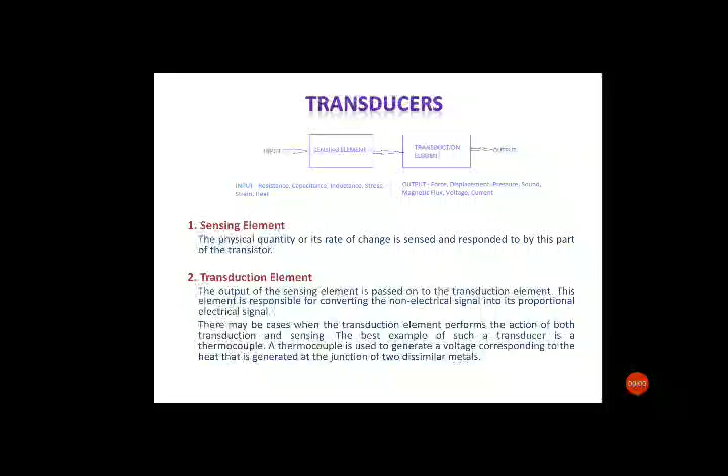Okay, in this session we'll be continuing our discussion on transducers. We know basically a transducer is an element which converts one form of energy into another form, and it consists of two elements. One is a sensing element and the other one is a transduction element.

Sensing element receives the input and the transduction element gives the output, and the input and output will be mostly in different energy form. Input may be something like a variation in resistance, capacitance, inductance, stress or strain, whereas output may be something like a change in force, displacement, pressure, sound or magnetic flux. And we'll see in detail the function of each of these elements.

The sensing element deals with the physical quantity under consideration. It measures the physical quantity or its rate of change, and it will give a proportionate output to the transduction element. The transduction element will convert the output of the sensing element into electrical quantity. So that is the basic function of these two elements.

But in some transducers there won't be separate sensing and transduction elements; rather these will be combined together into a single element which will receive the input and generate electrical output. One example may be a thermocouple. In a thermocouple, based on the temperature changes at the junction, a corresponding electrical signal or EMF will be generated. So that is how generally a transducer works.

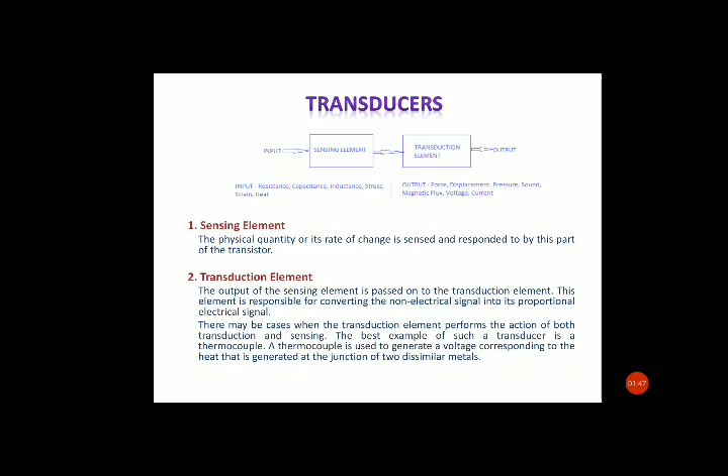We'll see a particular type of transducer which is a strain gauge. Basically it's a resistance based transducer. So in the coming session we'll be seeing in detail about the strain gauge. The strain gauge basically measures strain, or in other words it measures the pressure or weight acting on it.

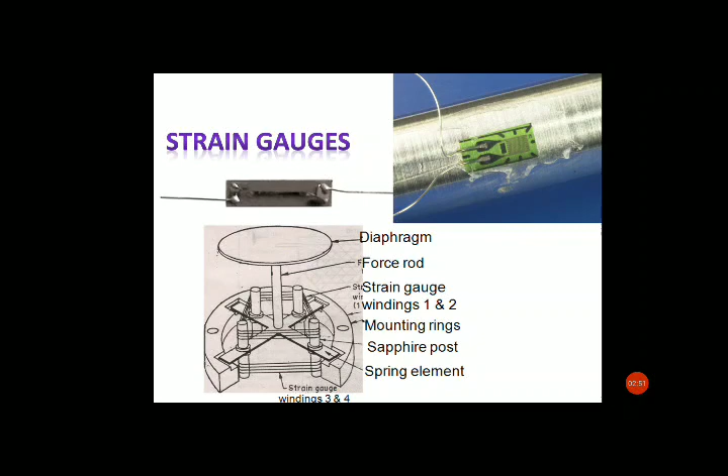So these are the applications of strain gauges, and it looks like a thin wafer like structure as you can see in the image, and it will often be connected to the physical quantity where we need to measure the pressure or force or weight acting on it. In the image you can see the strain gauge is attached to a metallic pipe, where we need to measure the strain acting on the metallic pipe.

And coming on to the working principle of strain gauge. Strain gauge is a passive transducer, means it doesn't require external energy sources, and converts a mechanical displacement into change of resistance. So that is the basic principle of a strain gauge. It converts mechanical quantity into corresponding change in resistance. So a strain gauge is a thin wafer-like device that can be connected to a variety of materials to measure applied strain, as we discussed earlier.

So metallic strain gauges are manufactured from small diameter resistance wire, basically composed of resistance wires that can be stretched upon action of strain. So based on the stretch of this metallic wire, the resistance will change, and according to the change in resistance we will be able to get the quantity in electrical terms.

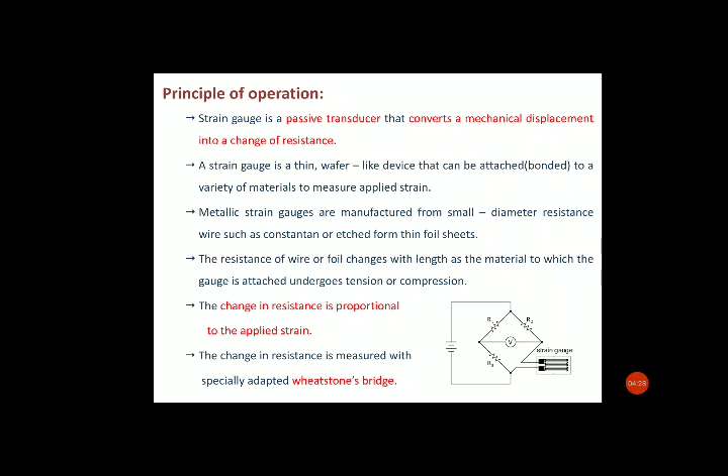The change in resistance will be proportional to the applied strain, and you can see a diagram here which is of a Wheatstone bridge. Wheatstone bridge is used to measure the unknown resistance. So one limb of the bridge is connected to a strain gauge so that we can measure the resistance of that particular strain gauge or the resistance wire. So this is how it works.

And now in this session we will be deriving an expression for gauge factor. Gauge factor is a very important quantity regarding the strain gauge, and it is represented as K equal to delta R by R divided by delta L by L. So delta R by R represents the unit change in resistance, whereas delta L by L is a unit change in length. So it is a ratio of unit change in resistance to unit change in length.

So K is gauge factor, R is the resistance of the conducting wire, delta R the change in resistance, L is the length of the wire, delta L is the change in length. So that is what gauge factor is, and we need to derive an expression for gauge factor of strain gauge. The denominator quantity here, delta L by L, is called strain. The expression for strain is change in length by original length. So that is strain, we know.

And this change in length by original length can be represented with the letter sigma. So the expression for gauge factor can be rewritten as delta R by R by sigma. And we already studied an expression for resistance of a conducting material with regard to the type of material. So that is R equal to rho L by A, the classical equation for resistance.

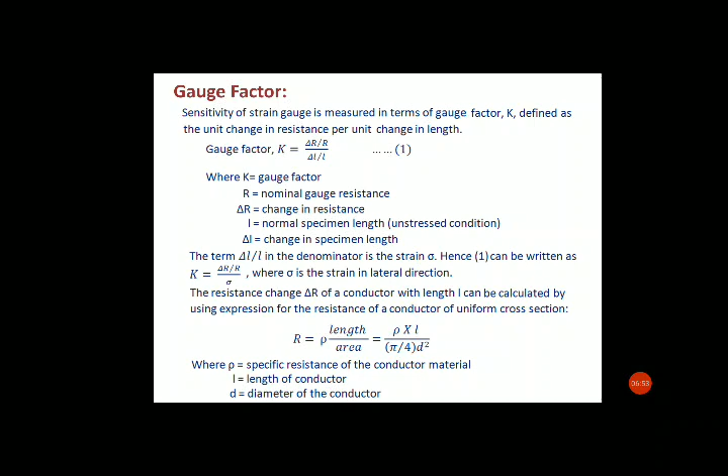And now we are going to consider the strain acting on the resistance. When the resistance wire is strained, it will make some deformations in the shape of the wire. That means there will be elongation of the wire, meaning length will increase. The new length will become L plus delta L, resulting in a corresponding reduction in diameter. When the length increases, the diameter will slightly decrease. So the decrement in diameter may be represented as delta D.

So upon considering the resistance wire after applying strain, that is Rs, resistance after applying strain, which is equal to rho into L plus delta L divided by pi by 4 into d minus delta d whole square. So d is changed to d minus delta d and L is increased to L plus delta L.

While expanding the d minus delta d whole square term, we will be able to get d square minus 2d delta d plus delta d whole square. Since delta d itself is very small, delta d whole square will be much smaller. So we will neglect that delta d whole square part.

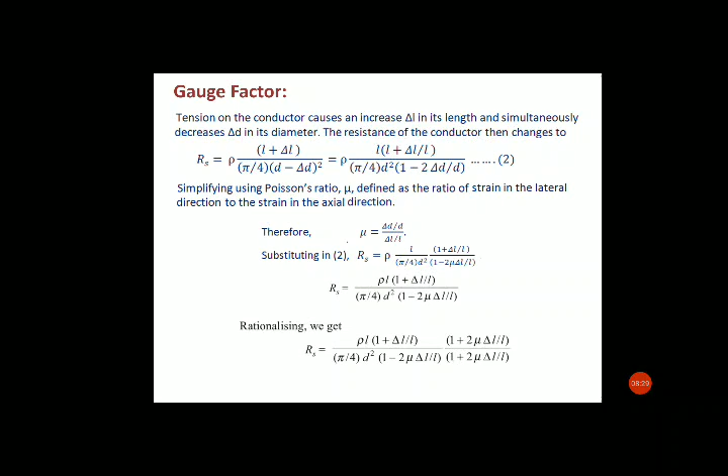The remaining terms can be represented like this: 1 minus 2 delta d by d, upon taking the d square term common. Instead of the d square, 1 will come, and 2d delta d, upon taking d square common, will become 2 delta d by d. So that is how the denominator changes.

In the numerator portion, upon taking the L term common, it will become L into 1 plus delta L by L. So it is 1. There may be confusion that it is L, but it has to be considered as 1. So L into 1 plus delta L by L. That is how the numerator comes. And so we got a new expression for resistance upon strain.

Now we are going to consider another quantity called Poisson's ratio. Poisson's ratio is defined as the ratio of lateral strain to longitudinal strain. That means mu equals delta d by d divided by delta L by L. Lateral strain by longitudinal strain. So this is an already known equation, Poisson's ratio.

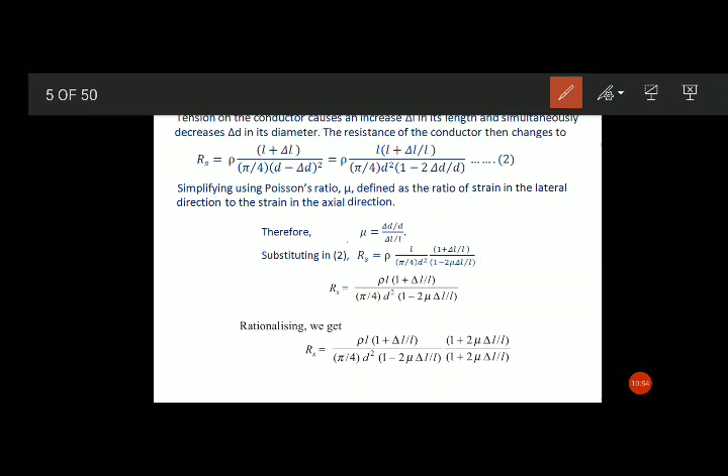Using this Poisson ratio to reduce equation number 2, we'll get an expression for delta d by d. This quantity delta d by d is equal to mu into delta L by L. So we replace that quantity in equation number 2. Instead of delta d by d, you replace mu into delta L by L. So the new expression is obtained.

This is Rs equal to rho into L into 1 plus delta L by L divided by pi by 4 d square into 1 minus 2 mu delta L by L. So that is how the new expression is obtained. Okay, now we got a new expression for Rs.

Now we are going to rationalize the equation. So what do you mean by rationalizing? We already have a 1 minus 2 mu delta L by L term in the denominator. We are going to multiply and divide it with 1 plus 2 mu delta L by L. That is what you mean by rationalizing.

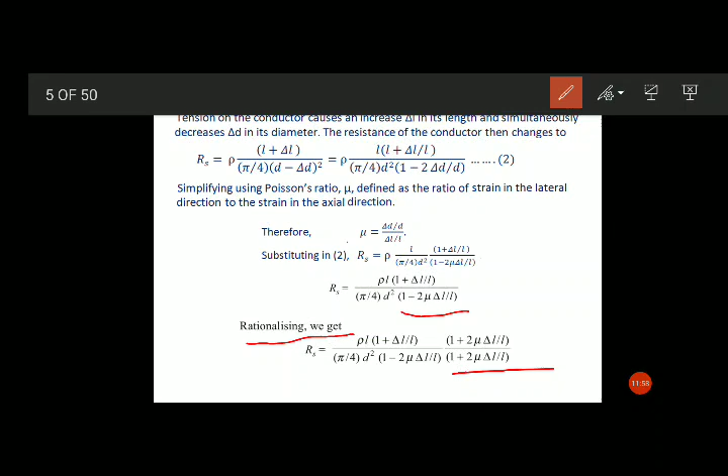Upon rationalizing we will get a new expression for Rs, where this quantity multiplied with 1 plus 2 mu delta L by L, removing the braces, gives 1 plus 2 mu delta L by L plus delta L by L plus 2 mu delta L by L into delta L by L.

And the denominator term will become a plus b into a minus b, which is a square minus b square. That is 1 minus 4 mu square delta L by L whole square. That is how we will get a new expression.

Here we have delta L by L and delta L by L. Multiplying these two together, we will get delta L square by L square. And so that is all about this portion. And we finally got an expression for Rs.

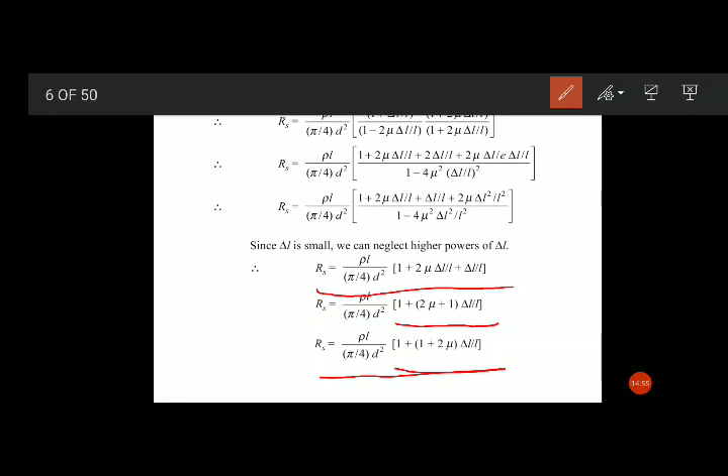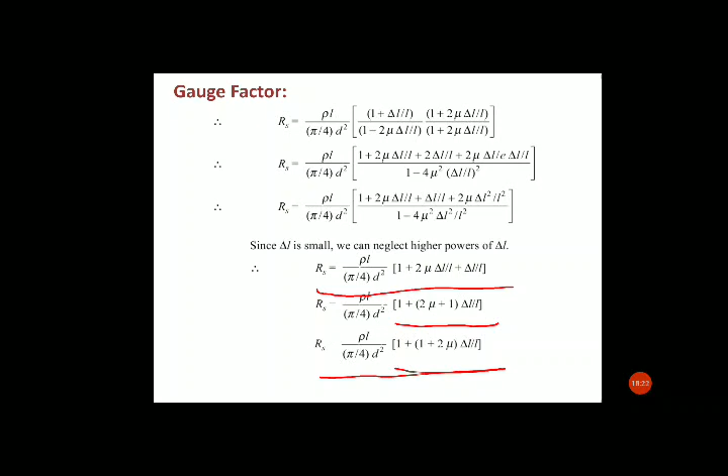And now from the previous expression, take the rho L by pi by 4 d square term into the brackets. Then you get rho L by pi by 4 d square plus 1 plus 2 mu into delta L by L rho L by pi by 4 d square. That is how you get this expression: R is equal to rho L by pi by 4 d square plus rho L by pi by 4 d square into delta L by L 1 plus 2 mu. Now we got the expression.

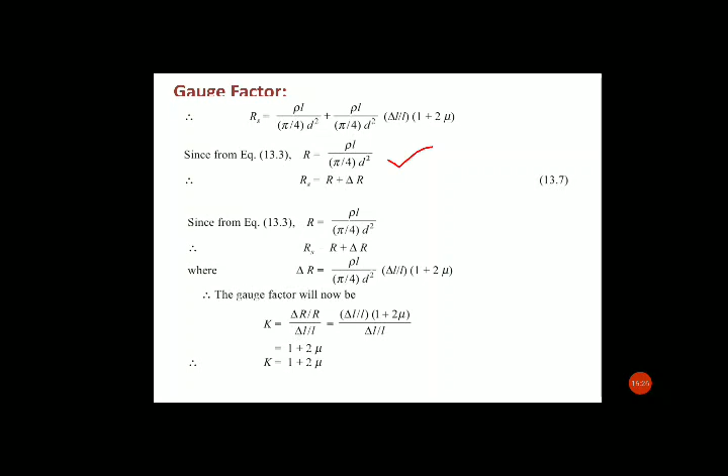We already know the equation for resistance: R equal to rho L by pi by 4 d square. So upon considering the new equation for Rs, you can find the resistance part, rho L by pi by 4 d square, and a new term, the remaining portion, added to the resistance term. That portion can be considered as delta R, added to the original resistance. So Rs is equal to R plus delta R; we will be able to consider that equation like that.

So we got an expression for delta R: the remaining portions in this equation. Delta R equal to rho L by pi by 4 d square into delta L by L into 1 plus 2 mu. Since we got an expression for delta R, that can be replaced in the expression for gauge factor. We know the expression for gauge factor is K equal to delta R by R divided by delta L by L.

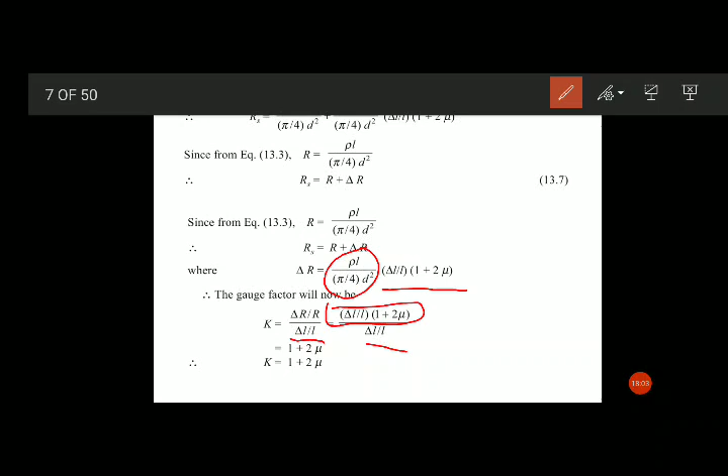Substituting delta R there, and we already know the rho L by pi by 4 d square term is R, so dividing delta R by R, those terms get cancelled. The remaining quantity will be delta L by L into 1 plus 2 mu in the numerator, and the denominator will be delta L by L itself. Again these terms get cancelled, so you get K equal to 1 plus 2 mu. This is the final simplified expression for gauge factor, where mu is the Poisson's ratio, the ratio of lateral strain to longitudinal strain, which is material specific. So finally we got an expression for gauge factor.

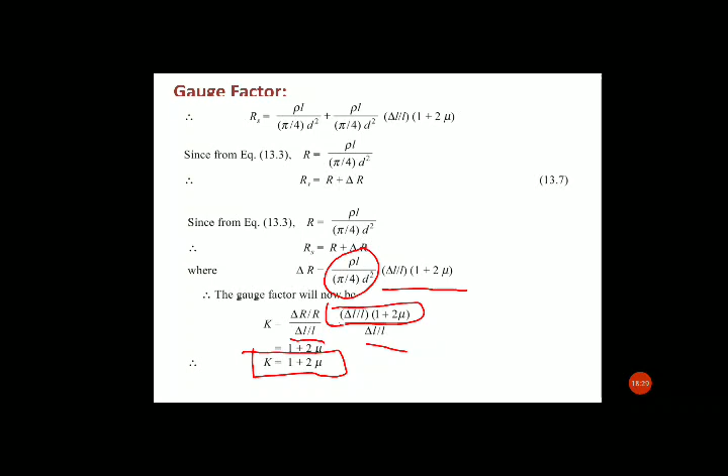And now a small note on gauge factor. We know gauge factor is K equal to 1 plus 2 mu, where mu is the Poisson's ratio. For usual resistance materials, Poisson's ratio varies between 0.25 and 0.35, so the gauge factor value, 1 plus 2 mu, will vary in the range 1.5 to 1.7.

What we intend is a larger gauge factor. As the gauge factor increases, the variation in resistance for a unit change in length will increase, so a larger value of gauge factor is more desirable. To increase the gauge factor, we can choose a material having a high Poisson's ratio. That is how we choose gauge factor for a particular application.